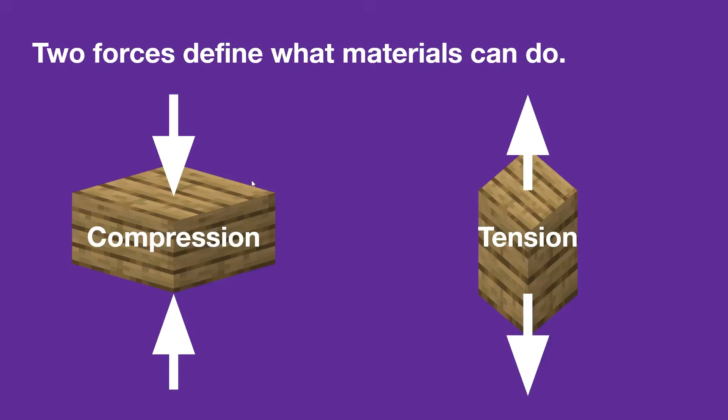Essentially, there are two forces that define what materials can do: compression and tension. Compression is when a material is forced together, and tension is when a material is pulled apart. And so, some materials are better at being compressed, and some are better at being pulled apart. And the goal of architecture is to create inhabitable space for humans. Duh. But people value certain things.

Namely, they like light, and especially natural light. They like protection from the elements. They want thermal stability and open space. And thus, the pursuit of architecture throughout history is the pursuit to maximize these elements. We want bright spaces, we want to be enclosed, we want to be safe, and we want to have kind of an open space. And throughout history, people have tried to accomplish that to the best of their ability.

So the earliest structures made the most of limited materials. Essentially, all we had at the start were rocks, and rocks are notably very good in compression, but terrible in tension. And so, spaces were very small, very enclosed, or it just took a monumental amount of effort to lift these massive rocks into these sort of structures. What we could make was limited by what we had. As technology developed, we started to master these skills and push them to their limits.

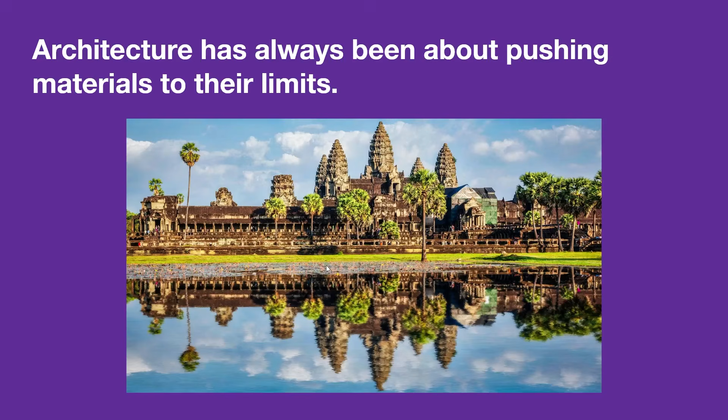And then more importantly, we innovated new, different technologies. So we have the arch and the dome, and these naturally evolved from what we had previously. And so, again and again, we pushed the limited materials we have to their limits. So as history goes on and we develop more technology, ceilings get taller, spaces get wider and more open, and rooms get brighter. We're able to take our limited knowledge and apply it to its maximum extent with the technology that we have. You see here, these spaces become as awe-inspiring as they can physically be.

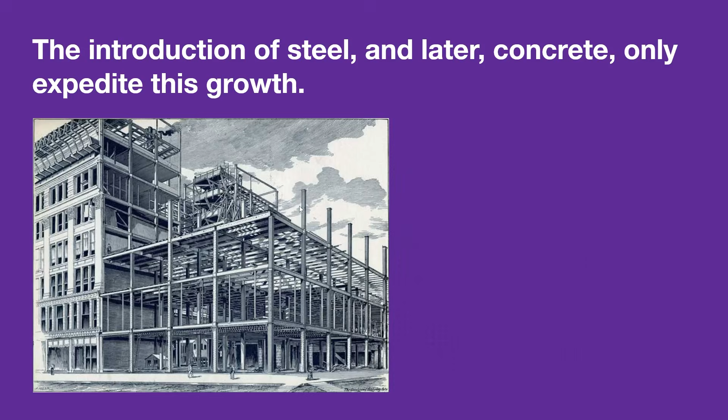It's cheap, it's strong, and it's fast, and suddenly what took a ton of people a ton of time to create could be done relatively simply with standardized parts, and thus we were able to create wider, more open, and more light-filled spaces for much, much cheaper and much, much faster. Then, the introduction of steel and later concrete only expedited this growth.

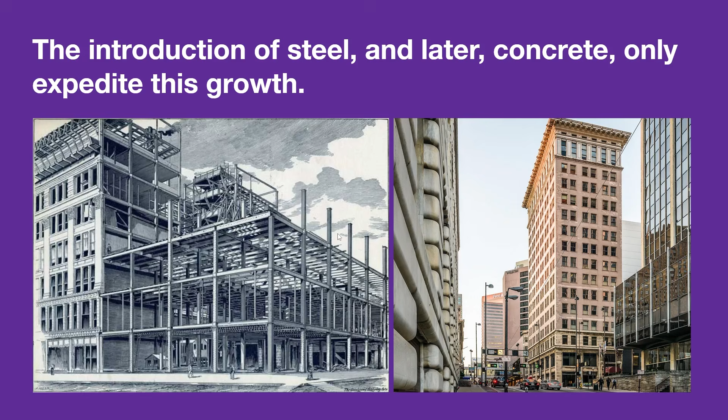From the start, where we had masonry and stone and wood, and we had to cut it and chisel it and have these kind of load-bearing heavy elements, there was only so much you could do with that. But steel and concrete are the two backbones of modern architecture. You can span greater distances, you can have stronger, more compact pillars, you can create whatever shapes you want, and we're granted so much more freedom by these new materials.

Today, we can do basically whatever we want with the materials that we have available to us. There's more organic shapes. Architecture is more of an open canvas than it has ever been at any point in human history. So, what are the reasons why architecture of today doesn't look like the architecture of yesterday? One, to create these kind of massive, ornate buildings is very, very time consuming.

And so something that may seem relatively simple if you don't think about it too much, oh, why don't we just add more detail to buildings? It takes a lot of time and a lot of man-hours, and that costs money. And so, especially in today's day, not many people want to spend so much money on a building. Sometimes they're seen as more of a functional piece than really anything that is art.

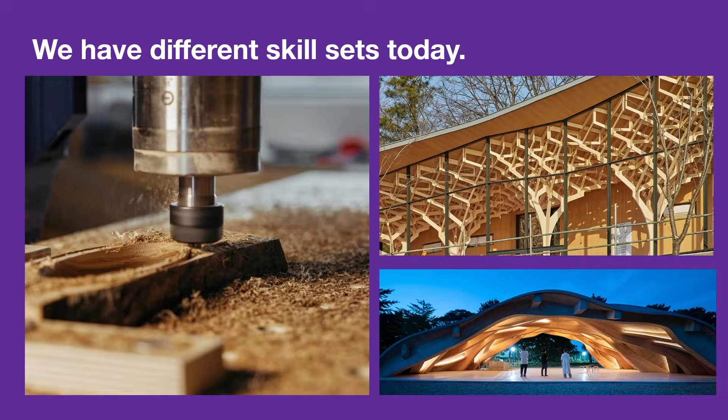Modern designs are more efficient than they've ever been before. If you had gone back in time and offered the premise of an all-glass building to someone back in the day, they would have gladly taken you up on that. The problem is that glass was never very thermally sound, and it also lets in a lot of light and heat that you don't always want. But nowadays, we have the technology to make glass efficient like that.

Thanks to double glazing and curtain wall systems, we can have these super tall structures that are clad entirely in glass. That's just not something that was feasible back in the day. But compared to these older buildings that we look up to, these newer buildings that are fully glazed offer a lot more natural light, natural ventilation, and it's just a much better deal for the interior.

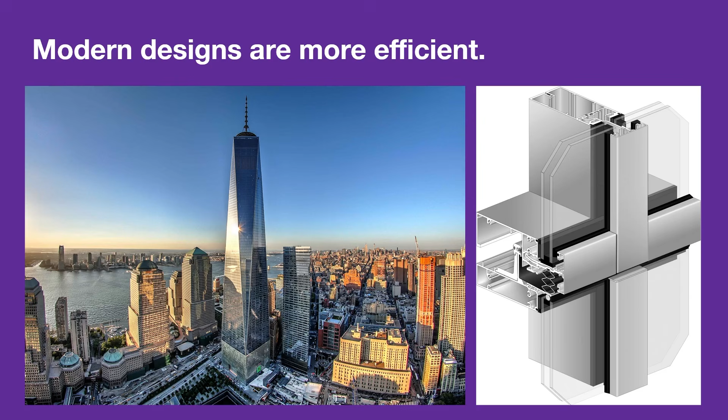It serves those goals I talked about in the beginning, where they provide some of the best spaces that we can provide with today's technology. And that also applies to, for example, methods of wall construction. Nowadays, almost every brick wall is not structural. The brick is simply a veneer that is clad onto the actual structure of a building.

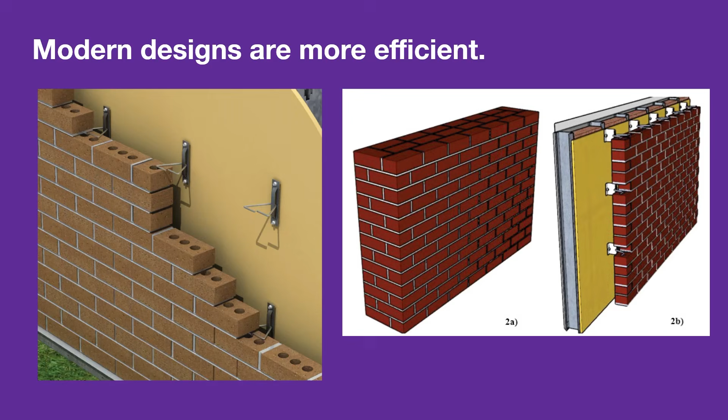You may think, like, why would we ever go away from this? But it offers more space and creates a more humane, livable interior that makes better use of the space inside. And we can do so much more with materials now than we could in the past.

And we need to include modern amenities. In 1940, 40% of households had indoor plumbing. By 1990, that number was 99%. Other things, electricity, HVAC systems, fire safety, and accessibility are also important features that we do need to include in our buildings. And it's often overlooked when you talk about historical architecture, just how much they really thought about safety and amenities. Those things all had to be either retrofitted in, or the building is not up to the same safety standards as something that would be built in the modern day.

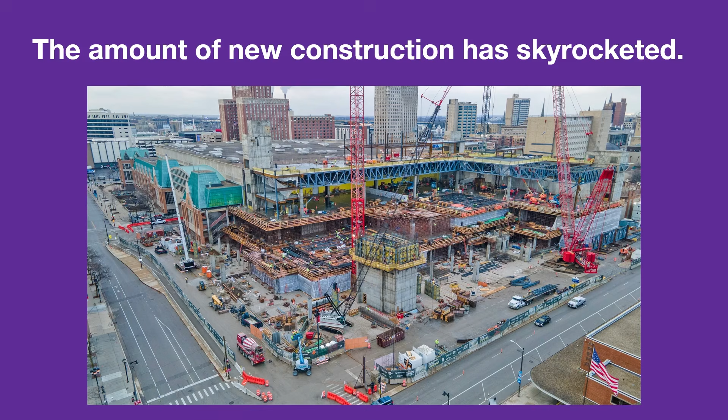But the reality is that they were focusing more on a smaller subset of buildings for the very wealthy and royalty, the church, people with a lot of money who could afford to build these massive buildings, compared to these smaller clients that do not have as much but are able to create something that is of the same quality in today's day.

It's disingenuous to compare the super projects of yesterday with the mundane buildings of today. Something like the Taj Mahal, which is universally regarded as a beautiful work of architecture, took 20 years to build and cost $1 billion in today's money. It's unfair to look at these monumental projects commissioned by the literal rulers of nations to something as simple as a housing project built in small town USA.

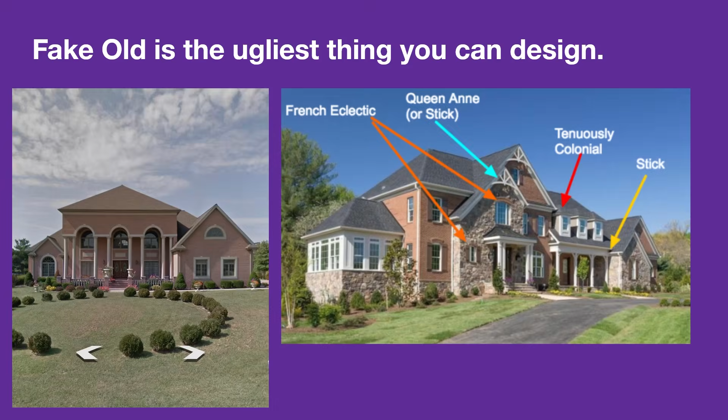And we see this a lot with these kind of McMansions, where they copy Greek columns, pull them way out of proportion, really pull everything out of proportion, or just borrow a mishmash of different pieces from different styles without any regard to the history behind them and how they really fit in to the greater work as a whole. And you cannot replace real materials with fake ones.

And one of the biggest pet peeves I have are these stick-on veneers that are meant to emulate some kind of material. Like, for example, this stick-on stone. A real cobblestone wall is made from found material that's either stacked mortarless or cut and then mortared to create a wall. And so that has thickness, it has weight.

And having this fake veneer that you then punch windows into willy-nilly, it reads so fake and so ugly because it pays no attention to the history behind the materials and how they work. It just looks at the past, sees it for its face value, and tries to emulate it to no avail. It's ugly.

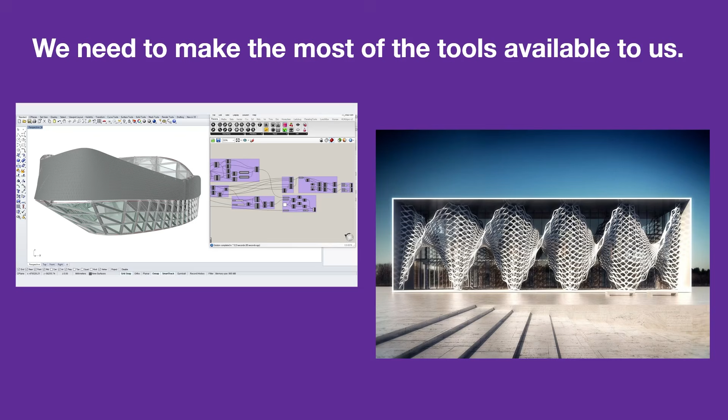All of these allow us to push architecture further than we ever have before, and truly innovative works of architecture should be maximizing this and putting everything we have to its fullest extent, just as we have throughout all of human history. There is no shame in borrowing ideas from history, but progress can never be made by trying to recreate the past. And so it's obviously fine to love old buildings. I love old buildings, but we can never ever recreate them exactly the way they were.

The historical context of the time is gone. We don't work with the same technology. We don't have the same lived experiences. The way work works isn't the same. And to try and go back to the way things were is just unfeasible. We need to continue to move forward as a society.